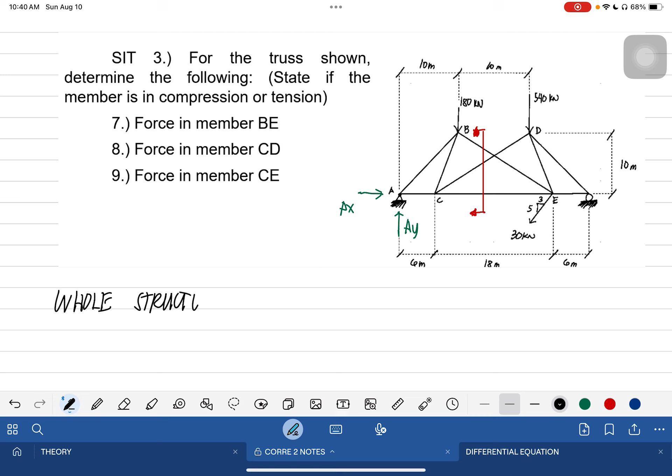Considering the full structure, summation of forces in X equal to 0, positive to the right: we have AX minus 30. The multiplier is 3, sorry, this will be 3. Then we still need the hypotenuse, so we have square root of 3 squared plus 5 squared, that is square root of 34.

Over square root of 34. Since there's no other horizontal load, this is equal to 0. AX is equal to 15.435 kilonewton. Next, let's get AY.

Summation of forces Y equal to 0, positive upwards. We have AY minus... sorry, we can't solve it that way since there's actually a reaction here too.

So what we'll do is take moments. Let's take moment about that point, call it point O. Summation of moments at point O equal to 0, clockwise positive. We will have 6 plus 6 plus 18, that is 30 times AY.

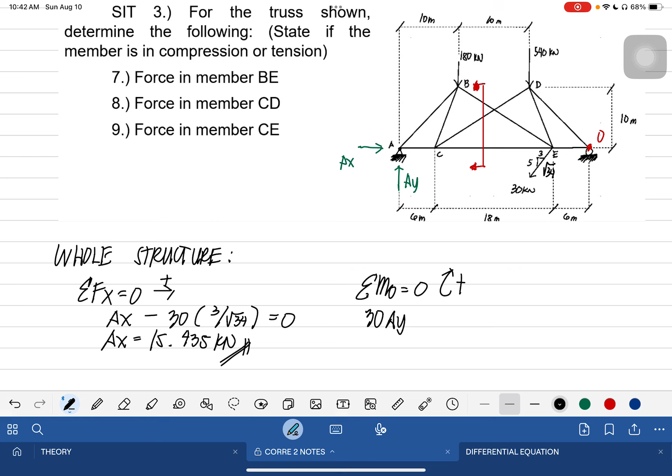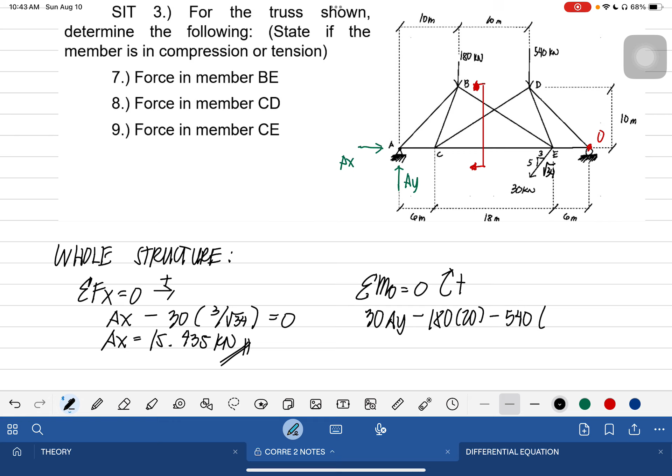Same goes for AX. So what will rotate due to the 30 kilonewton force? Only its vertical component will rotate it. So that is negative 30 times 5 over square root of 34, times the distance 6, equal to 0.

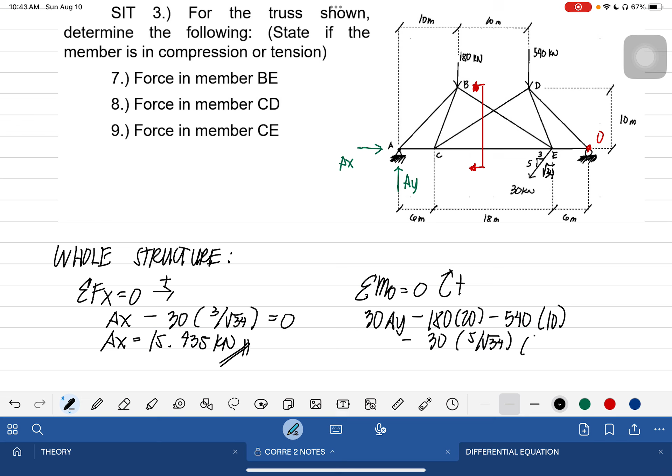So AY is equal to... AY is equal to 305.145 kilonewton. So that's our AY.